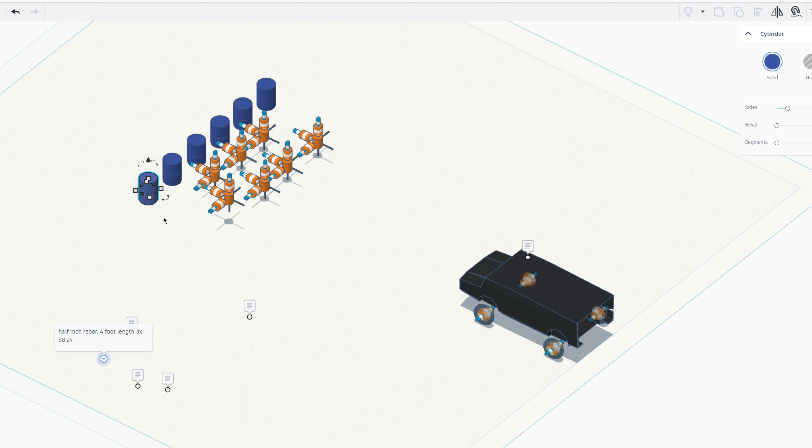These are simulations of a 55-gallon drum filled with water, and you can get 55-gallon drums all over Marketplace or Craigslist. Lots of companies that do any kind of industrial work have a bunch of these to get rid of. Sometimes they even pay to get rid of them, but you can get them for free or paid. You shouldn't pay more than like $20 a piece for them, but like I said, you can get them free all the time.

To construct this, I would get a heavy duty bolt cutter or an angle grinder from a place like Harbor Freight Tools for about $10, with some cutoff wheels, and measure 4-foot lengths of the rebar, mark them with chalk, and then cut them. Then I would make holes in the Homer bucket with a drill, and wire the 3 pieces of rebar together at about the halfway point at 90 degrees.

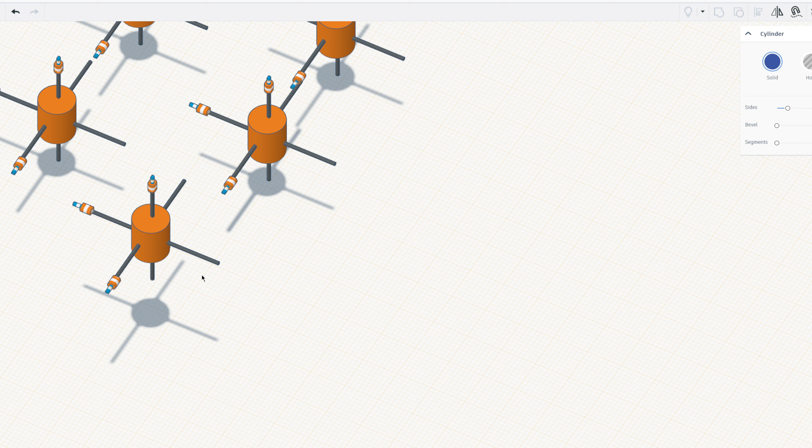If you have a welder, you could tack them, but you don't need to. Then fill up the bucket with concrete. The concrete will set completely in 24 hours, but you can use it a little bit before that. You'll get your ideal strength in about 72 hours.

And we'll go ahead and enter the simulation now. Please do note that this is just a simulation, and I am not encouraging anything. It is an experiment for scientific purposes.

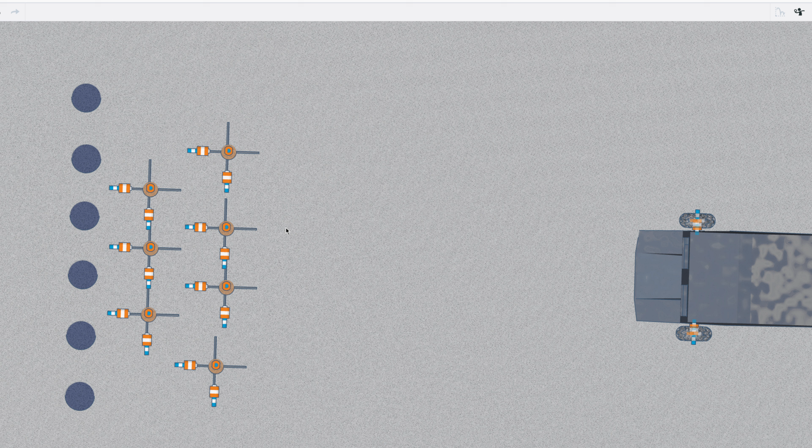And we'll go ahead and play it. Also note that this does not take into account any kind of deformation. I was not able to get a particularly ideal acceleration for the vehicle, but it does have about the right amount of torque.

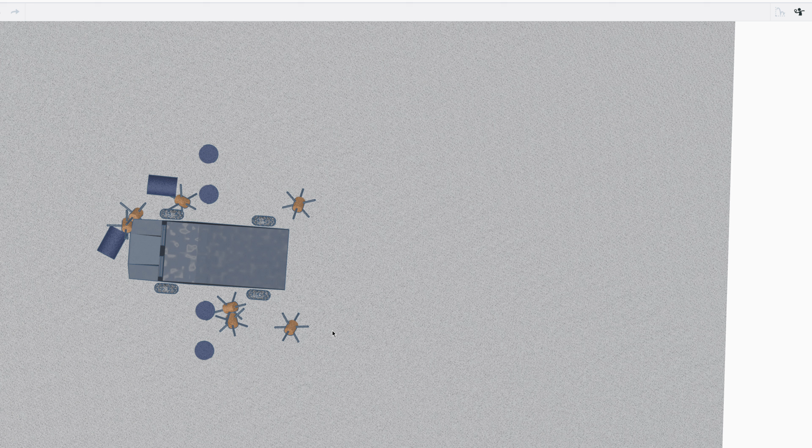Depending on how these are arranged, it can cause a significant barrier. If I move this over just a little bit, then we'll get kind of a different sample. But we'll go ahead and drive.

This is also not including any kind of deformation of the ground either. But you'll notice it did completely come to a stop there.

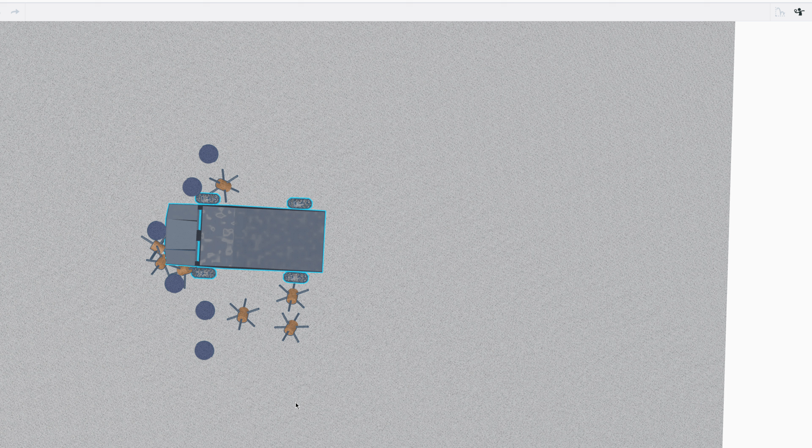And we can take it here and give it kind of an angle, and then play it here.

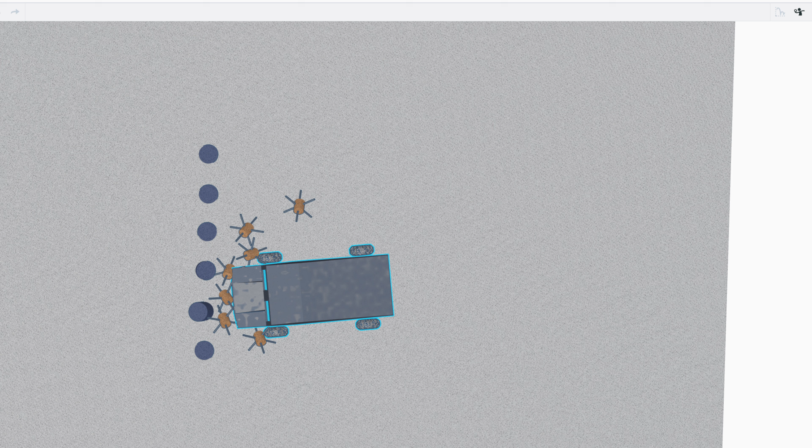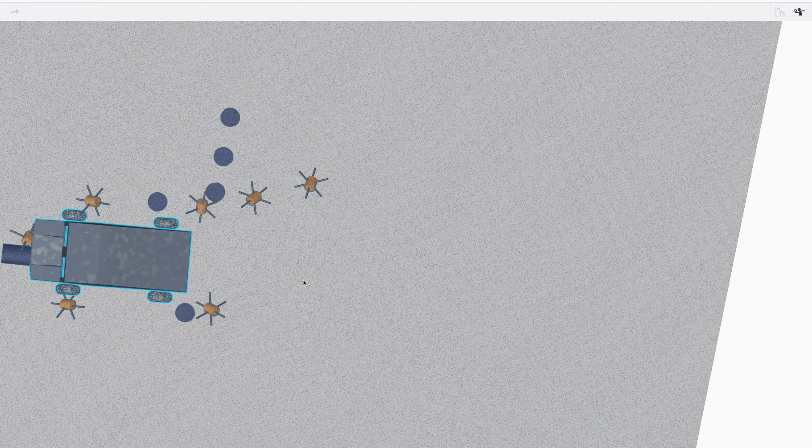Obviously your goal here is to give people time to move out of the way, to potentially protect civilians, or at least slow things down. And if you layer these differently or put other kinds of devices or constructions in the way, you may change your odds a little bit. But keep in mind, this is an extremely heavy, powerful vehicle.

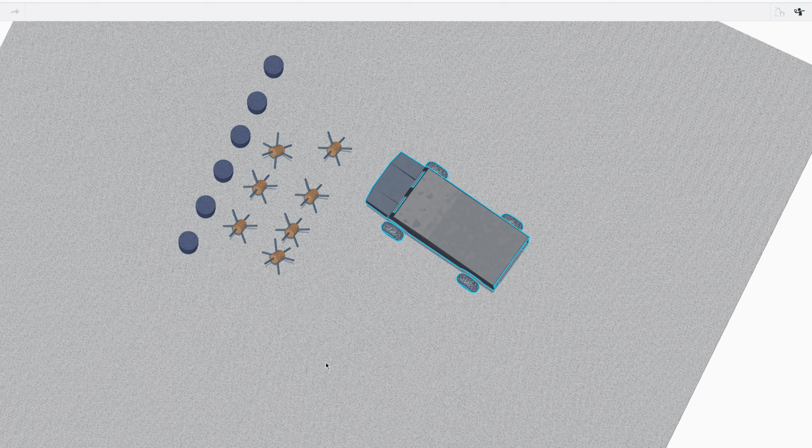And at the right angle, even a single one of these with a barrel is stopping it from proceeding.

I hope you found this informative and educational. And if anyone does any real world experiments with these, I would love to know the results. Thank you so much for your time.